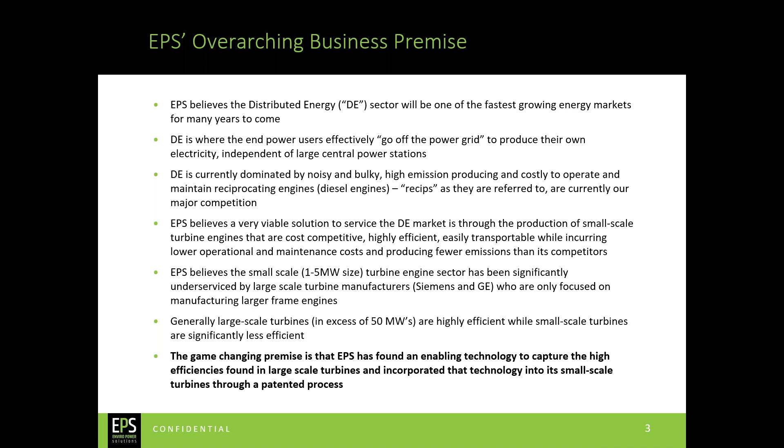So to be clear, we are not wind power, we're not solar power. Our sole focus is on manufacturing small-scale turbines to produce primary power, not backup power, using a variety of fuel sources for use in the distributed energy sector.

First, a summary of what our plans are and where we are today. I would like to go through what we would want in our engines. We would want the best-in-class efficiency, the lowest operating and maintenance costs, the lowest emissions, the longest operating life, and the best system uptime availability.

We're going to focus on manufacturing turbines in the 1 to 5 megawatt power range scale. This is considered small scale. Some would even say these are micro turbines.

Initially, we will have two turbine engines. One will be a 1.6 megawatt multi-fuel turbine that will use any form of liquid or gaseous fuel as its power source. The other will be a 1.2 megawatt biomass turbine that will run on any form of solid waste biomass. The key is that our engines will compete very favorably against the diesel engines that currently dominate this engine space. EPS engines will provide primary power for many end user groups using an abundance of fuel sources.

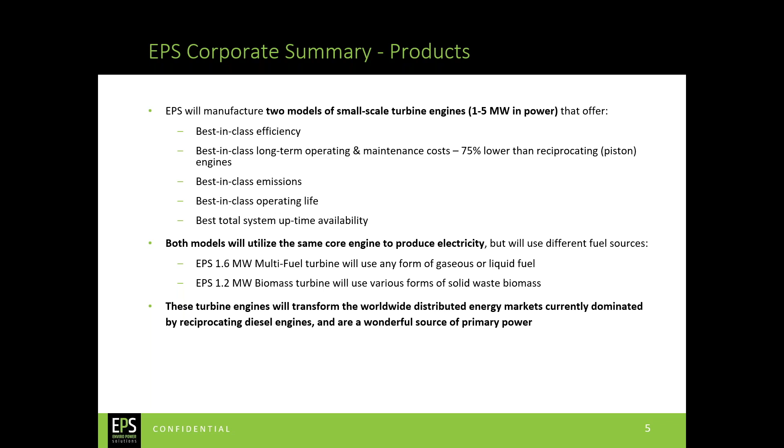We have about 8 years in development already under our belt. We raised and fully deployed $6 million US in cash equity we received from about 35 shareholders, mostly friends and family, in this initial development stage.

The enabling technology has been secured through a 20-year royalty-free license arrangement with our design and engineering partner, Brayton Energy, but more on them later.

We built and successfully tested a quarter-scale model of the biomass combustion chamber. We have 2 customers that have signed letters of intent to purchase significant quantities of our turbines.

We anticipate that we will be ready for full-scale commercial production in approximately 2.5 years after the alpha and beta stage testing is complete. What EPS is looking for right now is $18 million US over the next 10 quarters to complete the development stage and move forward towards full-scale production, but more on that later.

From a financial aspect, our first production engines are scheduled to be shipped in Q4 2022. Although I will go into more financial information a little later on in the presentation, we anticipate receiving our progress payments in advance of our first commercial orders. The first such payments are expected to be received in Q3 2022.

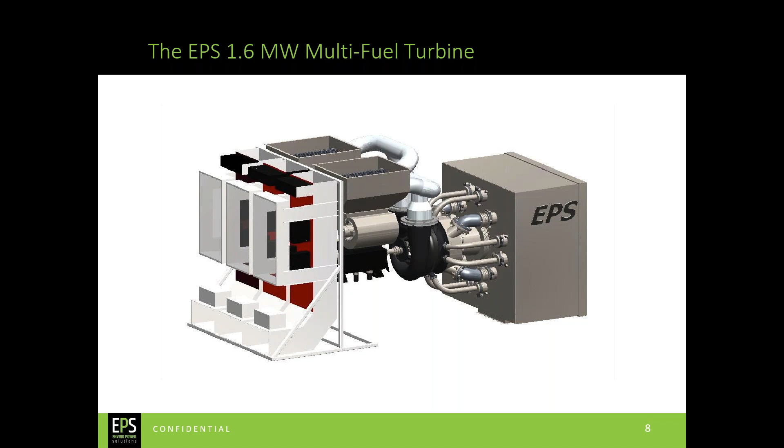This turbine can run on more types of fuel than just natural gas. It can run on any form of gaseous or liquid fuel. Besides natural gas, some fuel sources that could be used include propane, methane gas, high sulfur sour gas, synthetic gas, and biodiesel.

To give some reference, just one 1.6 megawatt turbine unit made by EPS will produce enough energy to power 500 to 700 homes, a small college or educational facility, a small hotel, a small to medium-sized office complex, a hospital, or a clinic.

For the techies in the audience today, the net electric efficiency is 40.6% at full base load capacity, or for those who prefer to hear our efficiency stated as a heat rate, it is 8,405 BTUs per hour per megawatt.

With natural gas at or near its lowest price in decades, combined with an integrated delivery system in most developed countries, natural gas fuel EPS turbines makes perfect sense today for end users who want to get off the grid quickly. The multi-fuel turbine can also be used as a peaker unit to provide additional backup power for larger corporate or industrial users, or for small utility companies who need additional power availability to provide customers primary power during peak hour periods.

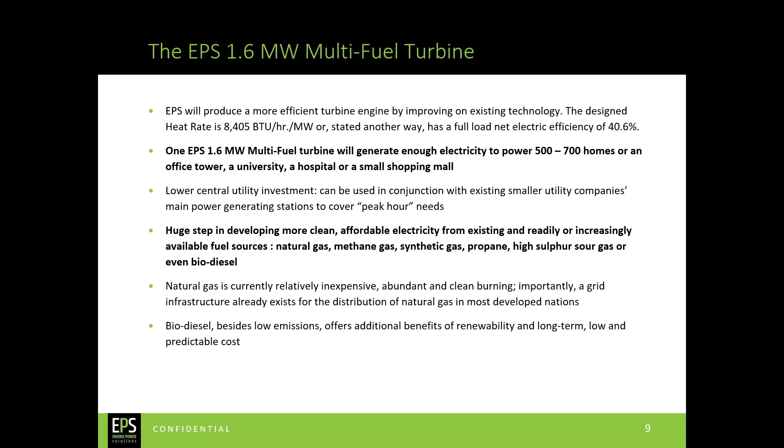An important aspect of both our 1.6 megawatt multi-fuel and the 1.2 biomass turbine is that there is large commonality of parts between the 2 turbines. So we are using the same core engine design for both turbines. This is a huge production advantage for EPS.

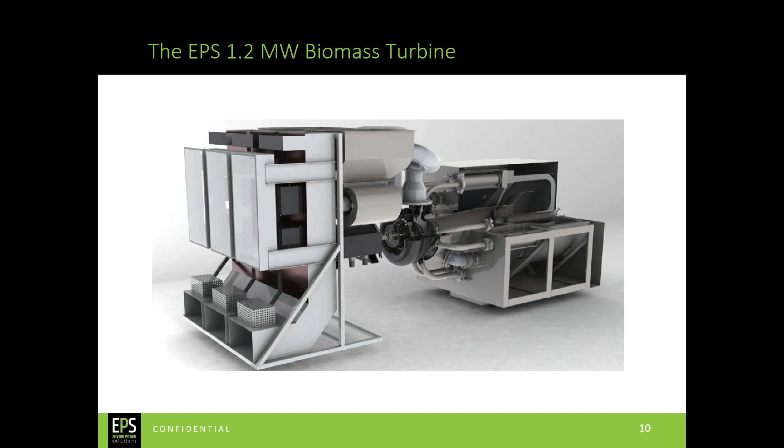Another key production and selling feature is that both engines can be scaled up to 5 megawatts of power, and if required by a customer with larger power demands, they can be put in series to form a 20 megawatt power substation. That is a lot of power to potentially get off the grid.

Firstly, it should be noted that to our understanding, there is no other biomass turbine that exists today in the 1 to 5 megawatt size range. That's what makes EPS unique and gives us a competitive advantage when providing power to the distributed energy sector using turbine engines, is our biomass capabilities.

Our biomass engine fulfills the growing world demand for affordable, sustainable, and renewable energy. We can run on many forms of biomass fuel, including wood chips, wood pellets, sawdust, animal waste, bagasse, which is sugarcane extracts, commercial and agricultural waste, algae, and landfill trash, to name a few.

Most likely, our biomass units will be placed at where the fuel source is located or where the power is needed. For those of you familiar with gasification systems, our biomass unit does not gasify the waste.

So we avoid the costly process of heating, then cleaning the solid waste biomass into a liquid, then using this liquid to produce power. Our process is called thermal extraction or thermal conversion, where we burn directly the biomass at very high temperatures of approximately 1,000 degrees Celsius or 1,800 degrees Fahrenheit.

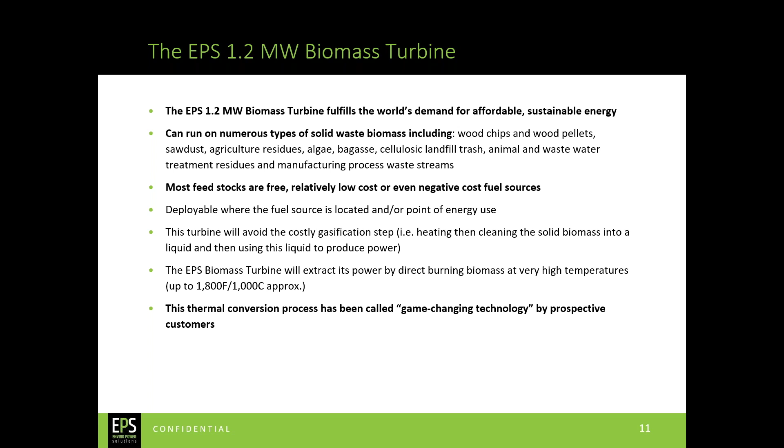Potential customers have told us this thermal conversion process is a real game changer.

There are three main advantages of EPS turbines over conventional-based diesel engines. First is that you want to have a high efficiency rating, which translates into lower fuel costs. Our multi-fuel turbine has a 40.6 efficiency. No other turbine engine comes close to that number in this power range.

For those who are familiar with combined heat and power, or CHP applications, our efficiencies could reach 80% to 90% when we transfer the heated ambient air into common areas, such as heating swimming pools and providing indoor heating to shopping malls or universities, or any structure with large open or common spaces.

Second, because of its very nature, turbine engines have many fewer moving parts versus reciprocating engines. So our operating and maintenance costs are approximately 1/3 what comparable recips would have. That is a huge cost saving for EPS.

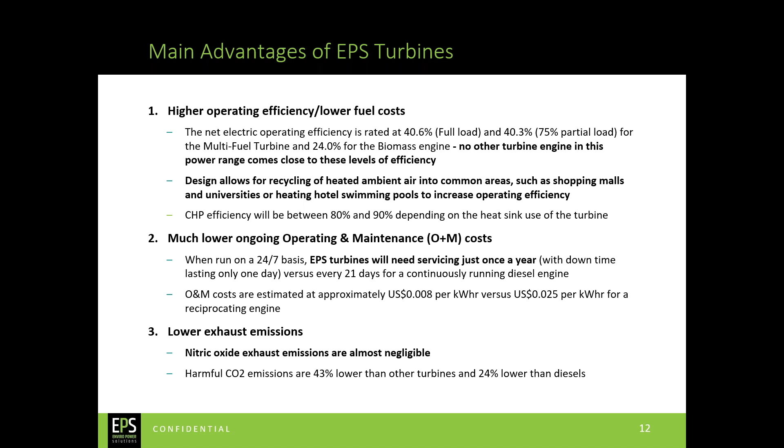Thirdly, a very important consideration today is that EPS turbines have almost negligible nitric oxide emissions, as well as extremely low CO and CO2 emissions. This factor is very key to potential buyers and users of our turbines who are conscious of the environment.

EPS turbines are designed to operate with minimum intervention and cost. When I mentioned that EPS turbines have lower operating and maintenance costs, one of the main reasons is that the initial life of the engine before remanufacturing is 60,000 hours, or about 6.8 years if that engine is running 24/7. That is a significant lifespan of any engine and a big benefit when considering to purchase a turbine engine over a diesel engine.

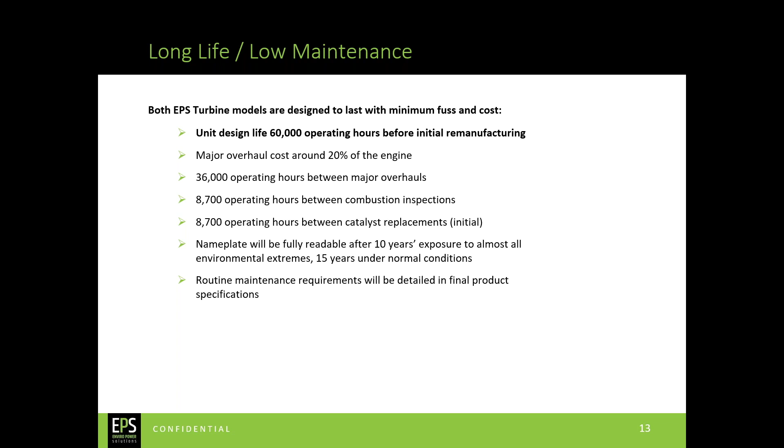In summary, there has been considerable interest when evaluating the benefits of an EPS turbine versus another small-scale turbine or a reciprocating engine. To summarize again, these benefits include that EPS engines are available in either liquid or a gaseous version or a biomass version with strong commonality of parts.

No other biomass turbine exists. We have very low emissions that will meet or exceed North American and EU emission standards. They're scalable up to 5 megawatts, and we received interest for a 3 megawatt version as well.

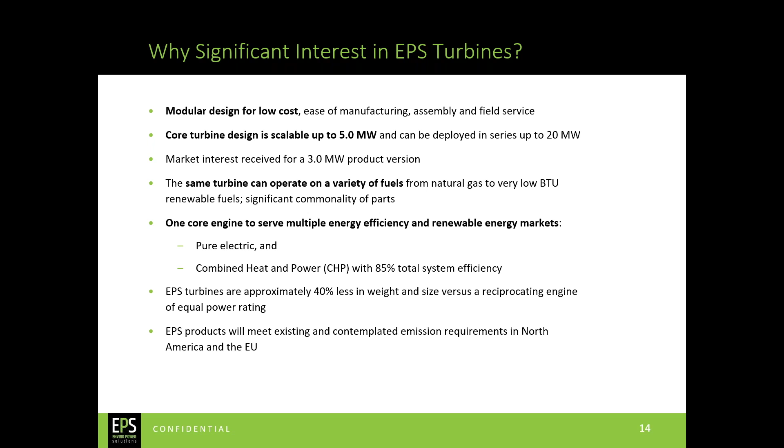They can be put in series to form a 20 megawatt power substation. They are lightweight and carry a small footprint. For delivery to a customer's location, they can be put on the back of a flatbed truck or a standard 20-foot shipping container.

One of the areas that EPS is very committed to is to ensure that EPS turbines have a worldwide reach, even in developing or underdeveloped nations. We believe that everyone should have the right to clean, reliable power at affordable prices.

We have had discussions with the government of Senegal and other African nations and believe that it would be wonderful if EPS can participate in powering Africa to provide enough energy for villages to have clean drinking water through water purification facilities, power to run a school, power to run a hospital or clinic, and provide the internet to villages to stay in touch with the world around them.

I would like to outline the benefits of investing in EPS and why your family office might consider an investment in our company.

Green energy investments are increasingly seen as attractive in private and institutional portfolios. In a few years' time, we believe EPS will be ripe for a takeover bid or as an early IPO candidate. We have three strong reasons for you to consider an investment in EPS.

Firstly, we have powerful economics to make an investment attractive. We have prepared a detailed 7-year financial projection. This forecast was based on input from our letters of intent potential customers, plus early market indications, which show an attractive sales growth leading to attractive gross margins and high ROI projections.

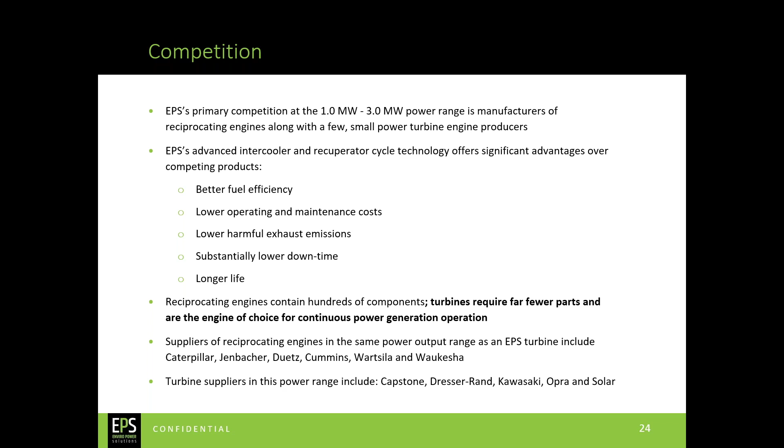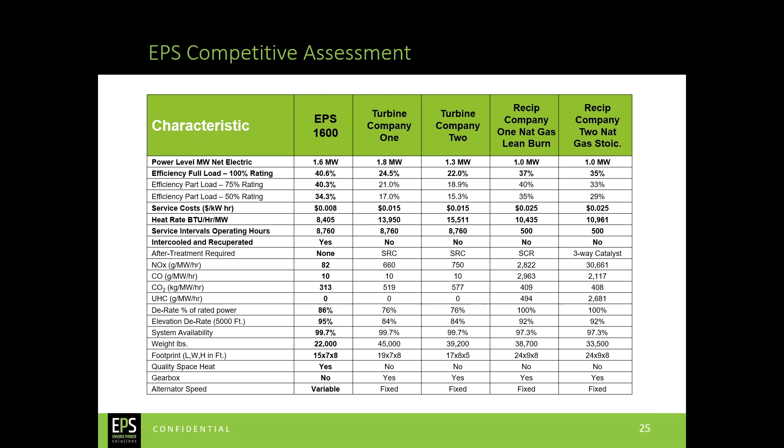Right now, EPS is working very closely with its technical partner, Brayton Energy, located in Hampton, New Hampshire. They have a very good website you might want to take a look at. They're a design and engineering shop with about 36 engineers as part of their 45 staff. To be clear, Brayton has no equity ownership in EPS — they are paid by EPS to build out the quarter-scale biomass combustor chamber and perform all the development work on our turbine design engine to meet EPS specifications. Brayton's key role going forward is to build out our full-scale alpha unit and the two beta units.

In addition, Brayton will provide ongoing technical support and sustained engineering once EPS goes into its commercialization stage. EPS's enabling technology is the patents owned by principals of Brayton on the intercooled recuperated system, which EPS has secured under a 20-year royalty-free license arrangement. I am in constant contact with Jim Kesseli, the CEO of Brayton. Jim is a big supporter of the EPS project and remains a special consultant to the EPS board.

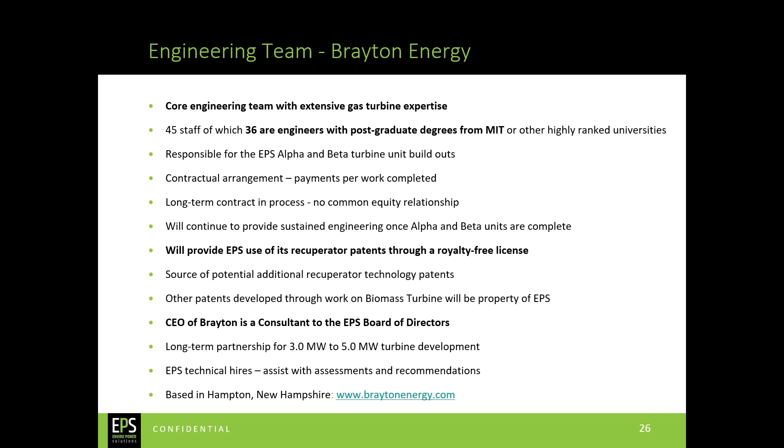Now we're going to look at two letters of intent we received. One is from a company called PowerSecure, in Wake Forest, North Carolina. PowerSecure is a subsidiary of Southern Company and a leading provider of innovative energy solutions to electric utilities and their industrial, institutional, and commercial customers. PowerSecure provides energy solutions in the distributed generation sector that EPS is focusing on. The company is a pioneer in developing distributed power systems and the integration of distributed energy resources. I've met several times with key senior officers, including their CEO. They have signed a letter of intent to buy significant quantities of both the multi-fuel and biomass versions of the EPS turbines. They are focused on our multi-fuel unit and want to use 70% of the units they purchase as peaker units to replace their aging recip engines.

The second letter of intent is from a company called O2E, out of the UK but focused on continental Europe. O2E produces synthetic fuels from plastic and organic waste materials. Their CEO really likes our biomass unit and wants to buy 300 to 500 megawatts of power capability from our biomass turbines in the years to come. They will allow us to install a beta prototype at their new R&D site, and they would also like to assist us in installing that beta unit at their R&D center.

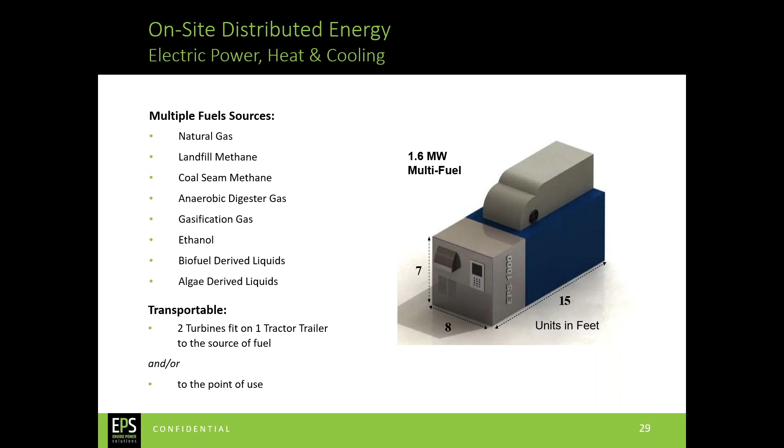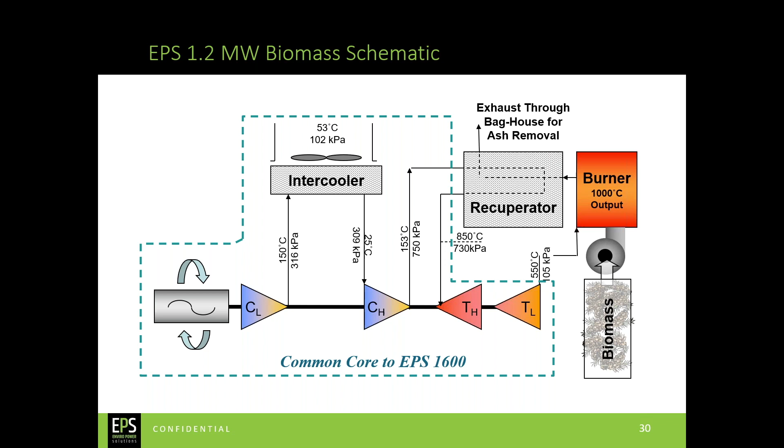The EPS biomass turbine produces only 60 pounds of ash as waste from every ton of biomass fuel it uses. This equates to only a 3% waste percentage.

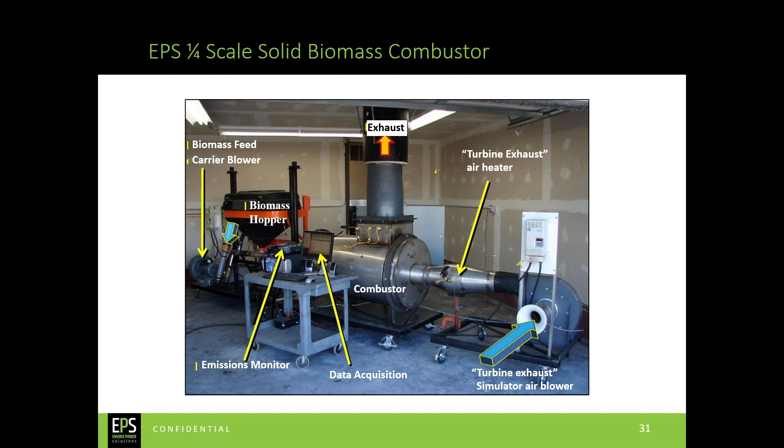Although it might look like somebody's backyard wood stove, here is the 1/4 scale biomass combustion chamber as assembled and tested at Brayton's New Hampshire facility. It was fired up using both sawdust and kelp. The key is that the data collected from the emissions monitor showed a very clean burn and confirmed that emissions particulates were within California government standards.

The EPS board is currently comprised of 3 members: myself, Paul Benefides, and Catherine Kelly. All of us are personally invested in EPS and have a long history with the company. Our bios are attached on the following slide, as well as the slide on the next page. I don't need to go over them in detail, but you can contact any of us.

To date, we haven't hired any full-time employees. We didn't want to hire a full staff before we had capital commitments secured, so we've been running a pretty lean shop. I have not been taking any money for the work that I have been doing, but rather have been taking my compensation in common and preferred shares.

EPS's progress to date has been made possible by the joint cooperation of 4 main parties. First, my fellow board members, Paul and Katie, who are with us today. Secondly, Jim Kesseli, the CEO of Brayton, and his engineering team at Brayton Energy. Third, I have a good group of former board members and senior shareholders at EPS. And lastly, 3 other special consultants to the EPS board, Doug Anderson, Steve Griller, and John O'Rourke, who I lean on for market and technical guidance and assistance with the capital raise component of EPS. All of these special consultants have extensive backgrounds in the turbine engine and energy fields.